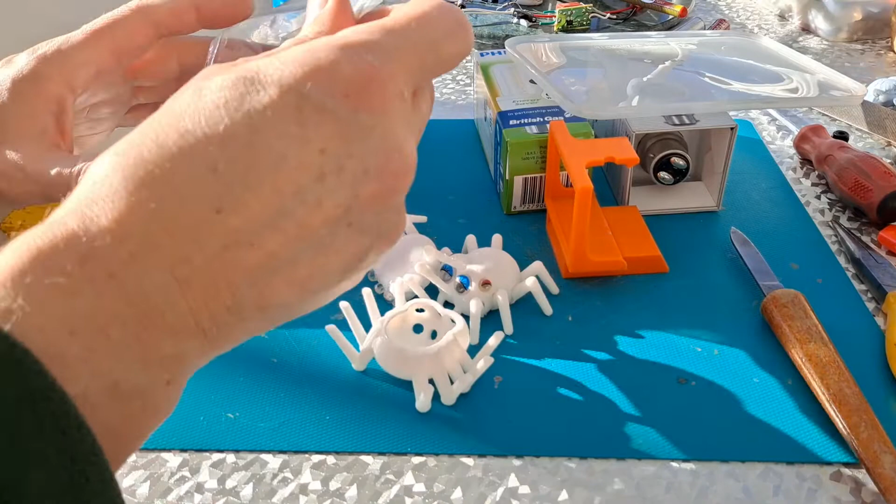Right, see if we can get a bit of leverage on it. Right, I think that's done it. Right, so that's out. We have some blue LEDs here. Right, that'll probably do for now, because it's time for us to go out and have our midday snack. But those look like they're okay. That one's a bit mucky, that one goes in all right. Yeah, they should be okay with a bit of trimming.

The other thing we need is another choke or inductor. You can buy them, they're not expensive, but I do have an awful lot of these CFLs, and I'm pretty sure that if I take one apart, we'll find a choke or inductor inside. So we'll do that when we come back from midday snack. So we had loads of these. They were actually giving them to us free at one time because the electricity companies were getting a grant off the government to get everybody changing over to low energy bulbs. But since then, I've changed everything to LED bulbs instead of CFLs. So I've got dozens of them.

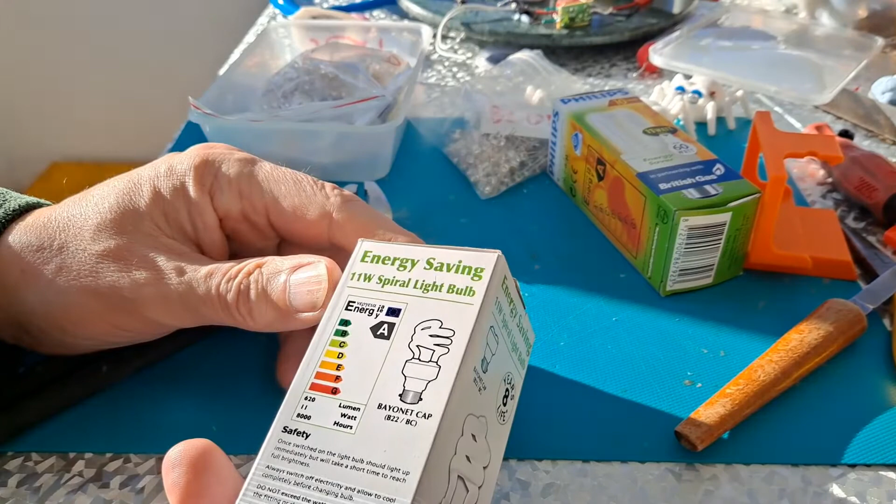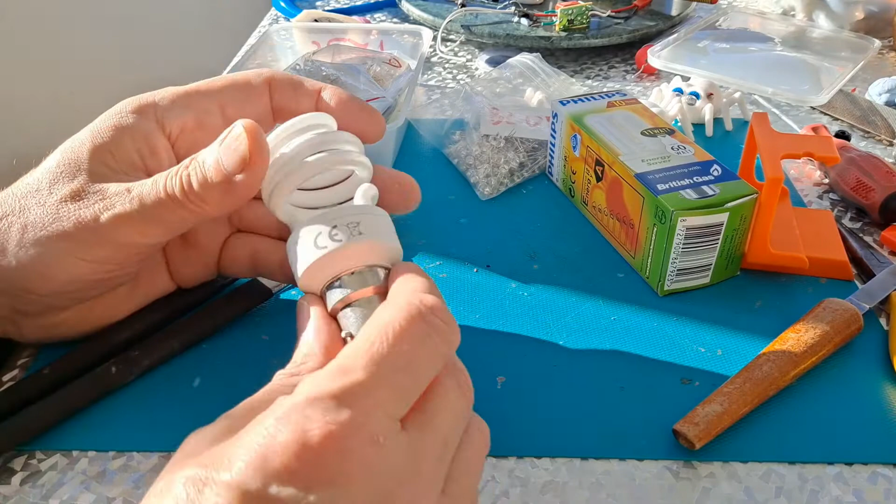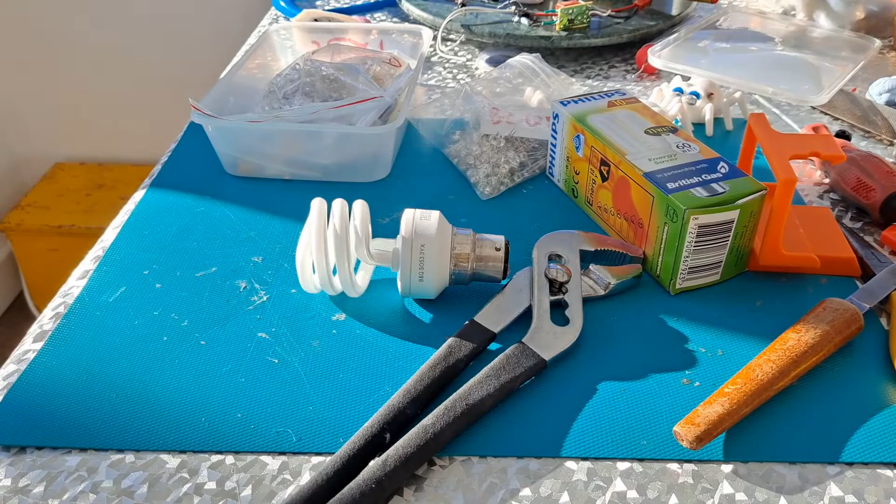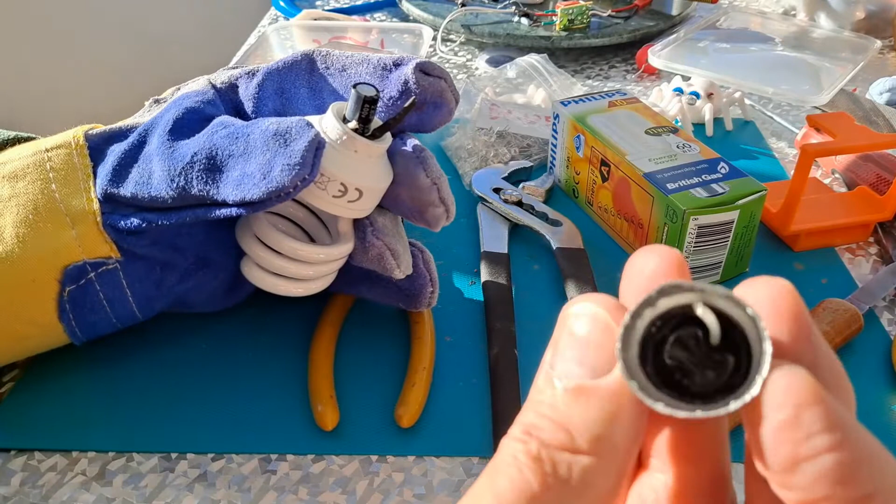Well, apparently Nanny's not ready to go for midday snack. So we'll take one of these apart. Well, we could take them both apart. Just look and see if they've got a date on them. Yeah. I put gloves on last time, didn't I? Just in case, because this is glass, and if it shatters, obviously you'll get it in your hand. Thinking about it, I don't remember whether we actually videoed me doing it last time. So what have we got in this one? Nice big capacitor. Right, that was actually potted in there, as they like to say, got black goo in it to hold it in place.

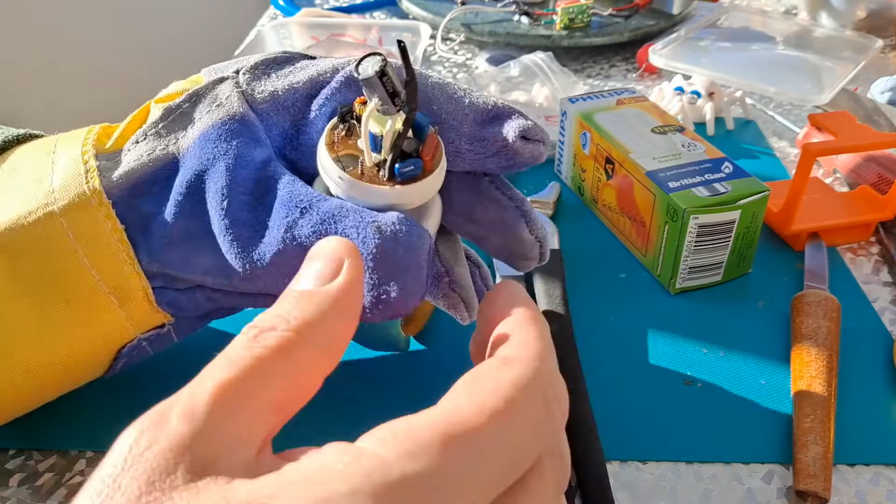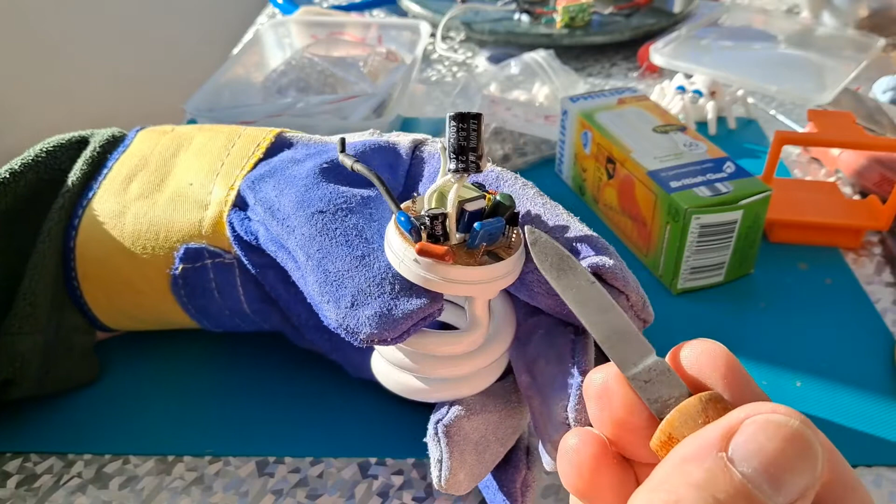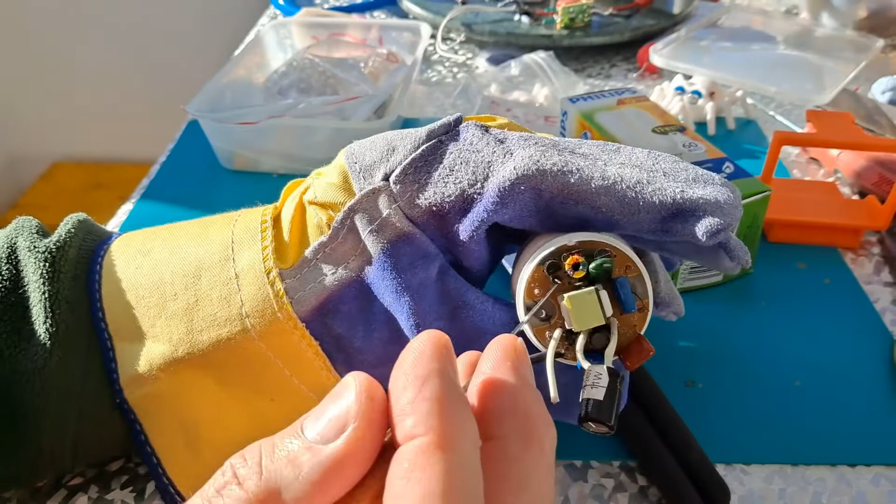There might be a choke in there. Oh, sharp bit of glass after all that. Oh yeah, there's a choke. It's just there. So that's what we want, that black thing. Just there. I mean, the capacitor will be useful. There's a transformer, coil, whatever you want to call it. Could be useful. A few diodes, 2 diodes, a couple of transistors. In fact, you probably can't see clearly, but there's a pile of bits over there from the last one I took apart. Yeah.

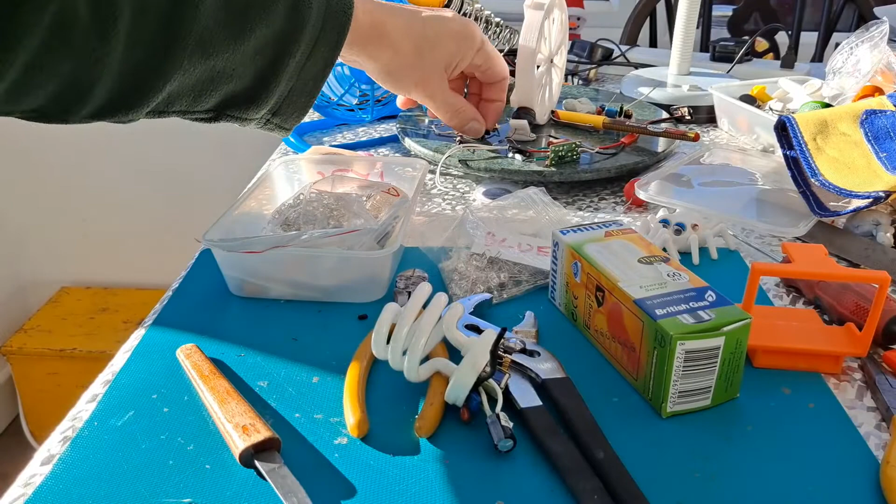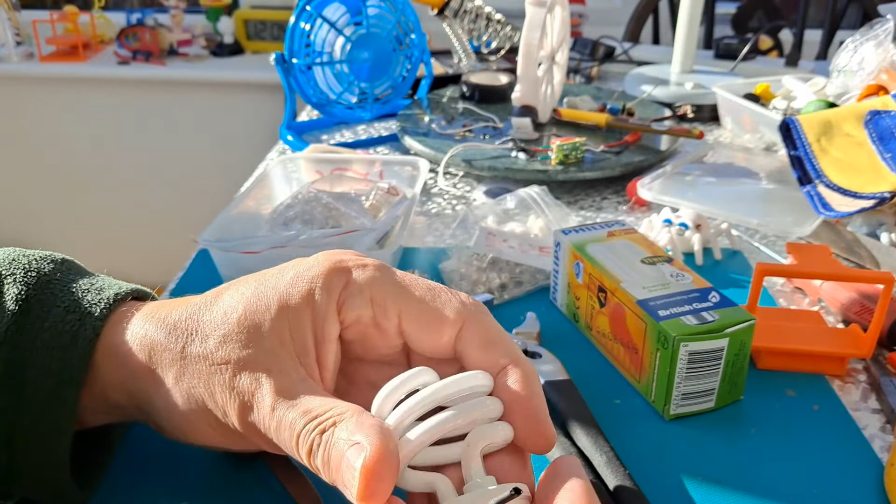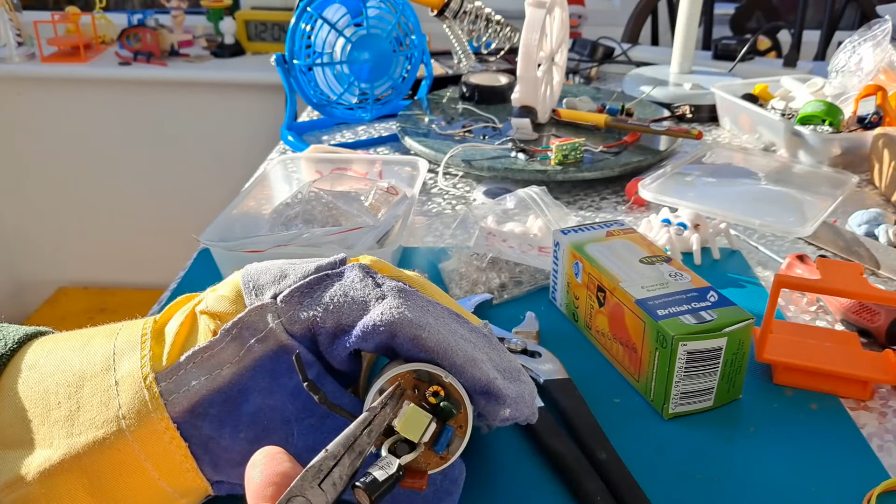So, yeah, little transistors, capacitor. One thing you want to be careful about, as I say, is this thing. Depends what they've held it in with. That bit you should dispose of carefully. Most recycling centres have got a suitable place to dump them.

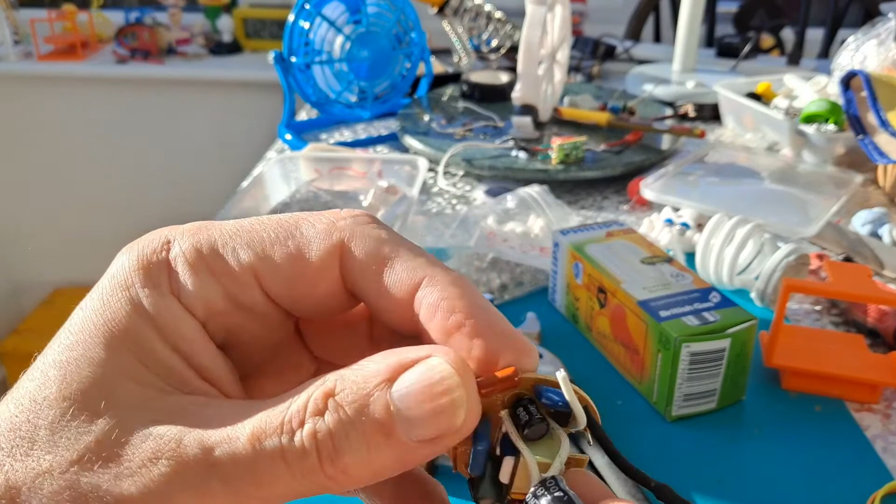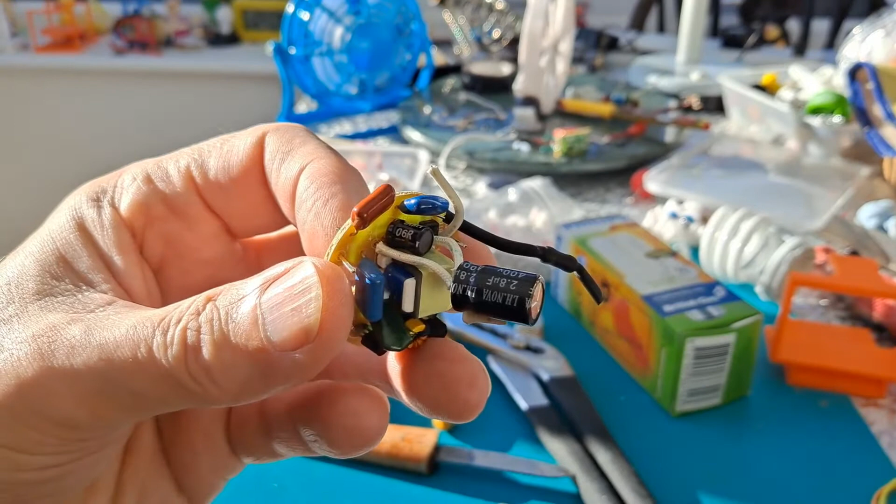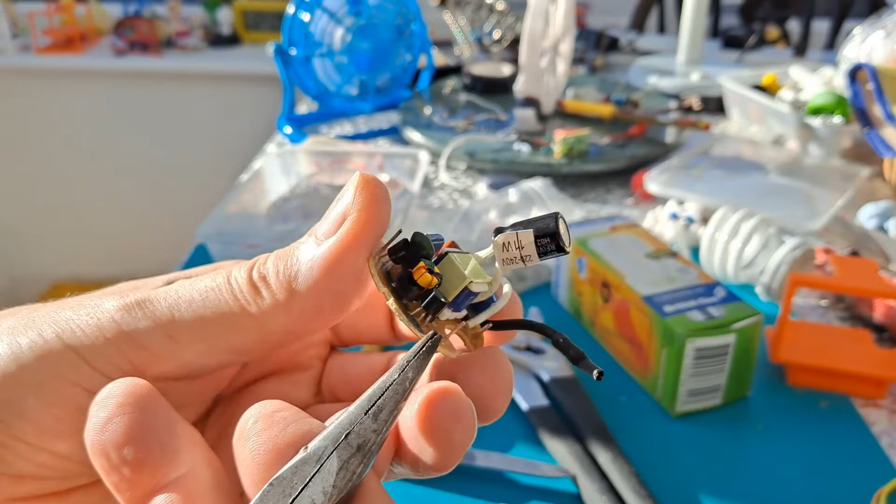And there's our circuit board. So we can see that choke a little bit closer now. Probably all out of focus, isn't it? Let's try and focus up close. So 3 millihenry choke. That'll do for us. So I'll save the other bits. Well, that was an interesting little sidetrack.

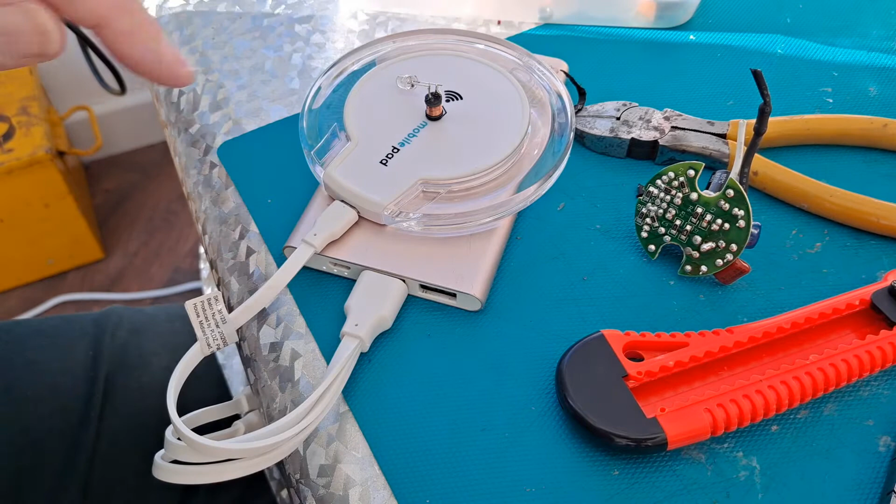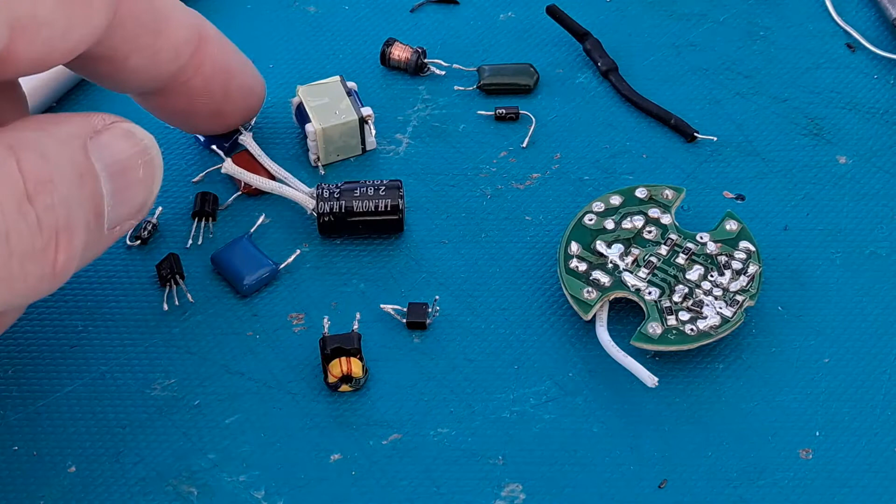When I pulled the choke off the circuit board, one of the legs came loose. So I had to strip the plastic cover off it, find the end of the wire and solder it back onto the leg. And I've just got a blue LED laying up against it just to check it works, which it does. So we're okay. I thought I was going to have to take apart the other bulb, which I could do anyway, but I've repaired the choke. It is just a ferrite core with fine wire wrapped around it with two legs, and wire soldered one end to one leg and the other end to the other leg. Well, that's all the bits off anyway. I thought I might as well go ahead and take them off. I haven't bothered with the surface mount components, just all the useful bits.

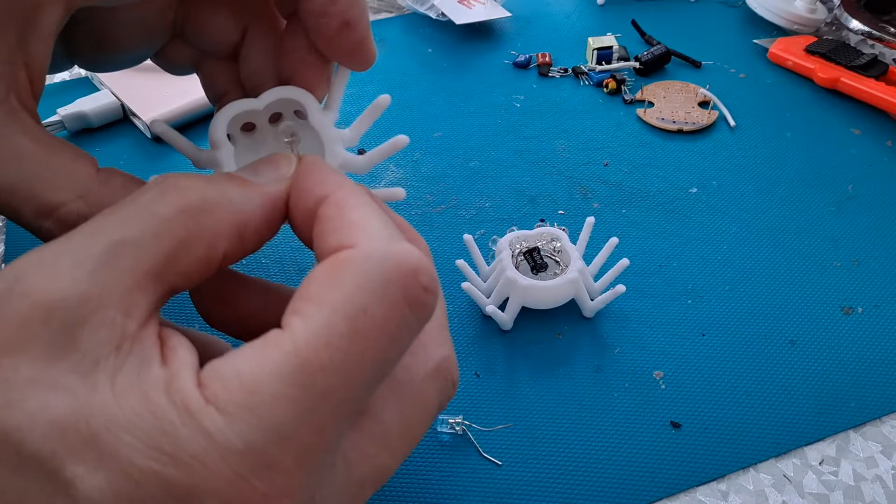Back from our midday snack. In fact, it's 3:15 and we lose daylight at about 3:30, so might have to finish this with the lights on. To connect these together, LEDs, long leg, short leg. I'm going to arrange these so the bottom row as we're looking at it all have the long leg at the bottom, short leg above it. Then the row above, exactly the same, long leg at the bottom, short leg at the top.

And then we need to link them together so the short leg of the bottom row links to the long leg of the top row, and then that goes to one leg of our choke, and then the long leg of the bottom row has to link to the short leg of the top row, and then that has to go to the other leg of the choke. Now you're not going to be able to see this clearly. Even if we look at this one, you're not going to see it clearly.

Right, this might help. You might be able to see the lower legs, which are the long ones, are all swept around to the left and soldered together. And I haven't soldered the short legs, the top ones, but you can see they're all swept around to the right. I think you can see that. And then I'll solder them together and do the next row of eyes above. Again, I don't think you'll be able to see the detail, but the middle row, top and bottom, are all connected together and swept round to the right. The top and the very bottom row are all swept round to the left and connected together. So we now need to add that one across there, and it should work.